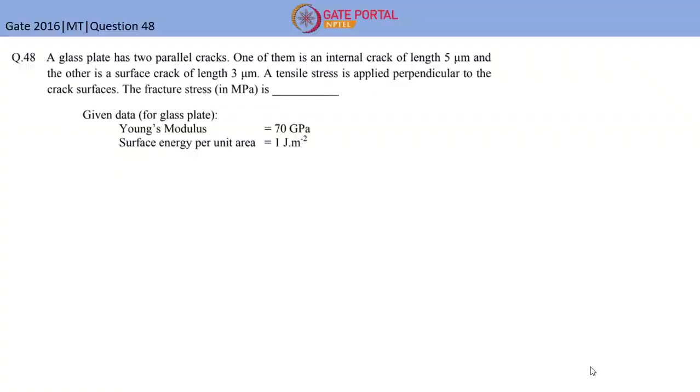So similar questions will be there in GATE also. These questions most of the times repeat by changing the values. So if you know how you can calculate that, you can get the answer very easily in less than 1 minute or so. So don't spend more time in this question. This is a fundamental question, only one formula you have to just add.

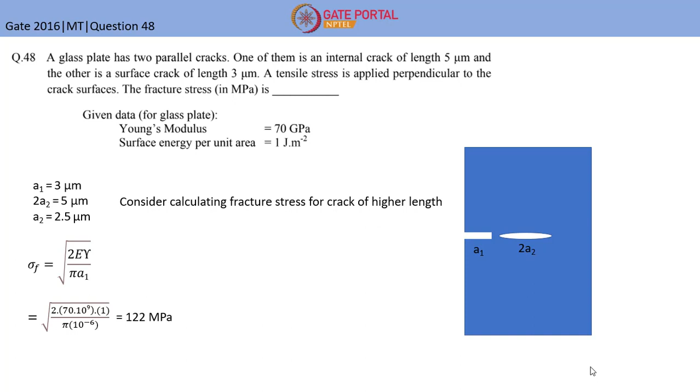But make sure that you use the GATE calculator, like you have hands-on practice on that GATE calculator, which is the online calculator. Sometimes the units may mismatch and you may get some different value. So this is another question. So I will give you 3 minutes to solve this.

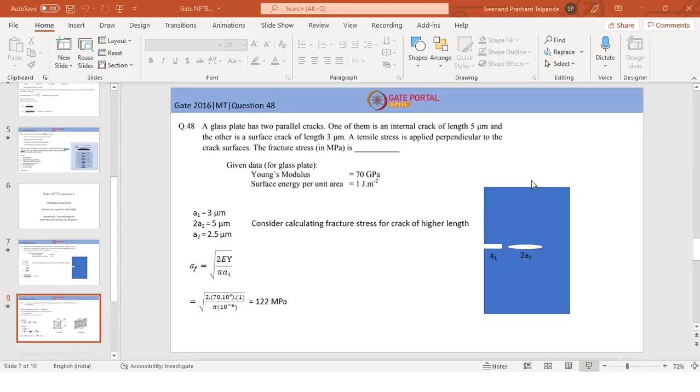Anyone got the answer? Root 3. Okay. 1.41. Okay. Anybody else? I will give you one more minute. We have to just find the surface energy of 100 plane and 110 plane in a BCC crystal, and we have to take the ratio of that.

This question comes repeatedly in GATE. You may know FCC crystal, BCC crystal, different planes. You need to focus on three main planes: 100, 110, and 111. You need to know how these planes are arranged in a BCC as well as FCC, which is the close packed plane and which is the open plane. That thing you need to know.

And what is the basic funda of surface energy, like why the surface has some extra energy than the bulk, that you need to know. In this, three concepts are there basically. So I will go through each of the concepts. I guess enough time is given, so I will proceed. Okay, so here we go.

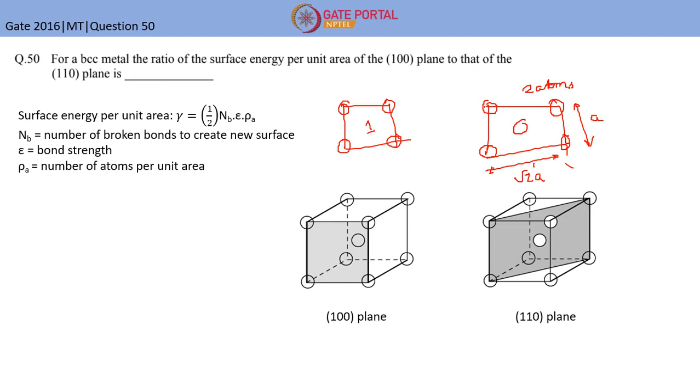So this is one atom, and this is another one atom consisting of four 1/4 atoms. So here 1, and this 1/4 of 4 atoms, which makes 2 atoms. And here also similarly you can see this projection will be a square consisting of 4 atoms. This, this, this. Now you have to see how much comes into this square. So this is 1/4th, 1/4th, 1/4th, 1/4th. So it accounts for 1 atom in this plane, and this accounts for 2 atoms. I hope I cleared your doubt. So you have to take a 2D projection.

Chintu, did I clear your doubt? Okay. So let's proceed to another question. Again, this is a numerical. I will give you 3 minutes to solve this. Okay. Solve this question. This is related to casting.

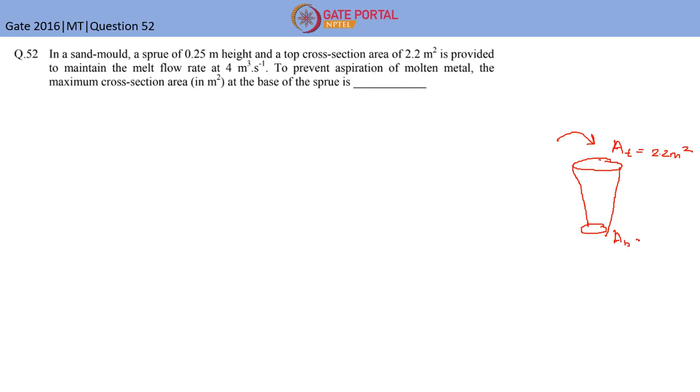So as you may know, sprue is like a chamber. I will just draw it here. So sprue consists of this and this. So it will be connected like this, and from here we pour the molten metal. So they have given us the top surface area AT, which is 2.2 meter square. Now we have to calculate AB.

So firstly we should know what is aspiration of molten metal. The pressure in the liquid metal stream moving through the sprue should not fall below the atmospheric pressure. So here P1 and here P2. P1 and P2 should be same. If these are not same, then atmospheric gases can be absorbed in the molten metal in low pressure areas, and this phenomena is known as basically the aspiration effect.

So if this phenomena occurs in casting, then our casting will be porous. Most of the regions will have some porosity because of these gases. Hence we want to avoid this. So we have to design a sprue in such a manner that no aspiration takes place. Given is that the flow rate is 4 meter cube per second and height of the sprue is 0.25 meter. Because of continuity equation, the flow should be equal from top and bottom, so that no gas can enter.

So A1 V1 equal to A2 V2, and V2 is given by root of 2gh, and this is derived from Bernoulli's principle. You can refer to Bernoulli's principle. It is a small concept where you can find out that V2 becomes root of 2gh. Hence Q is 4, equal to the final area into root of 2gh. g is 9.81 and height h is 0.25, and we have to find out the area. So area comes out to be 1.806 meter square.

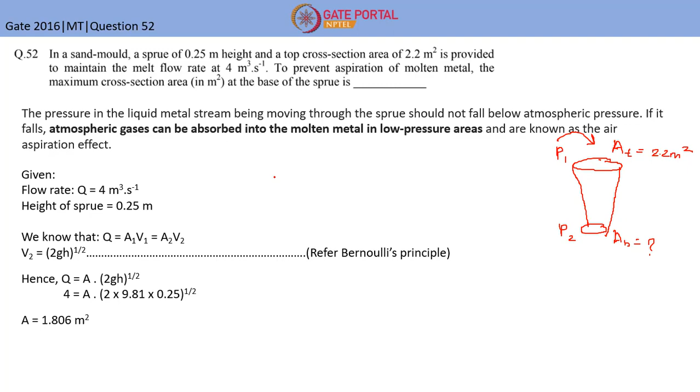Yeah, so air aspiration means, let's say you have a molten metal as well as air surrounding that molten metal. If pressure drops, what do you mean by pressure drops? If the continuity of molten metal is not achieved in a sprue, and the pressure is low at certain regions where the molten metal is present, this gas will try to get absorbed in the molten metal, and when it solidifies later, the solidified workpiece will contain porosities because of these absorbed gases.

So in order to have a casting with no porosity, we need to have continuity, and we need to design a sprue in such a manner that no aspiration takes place. I hope this answered your query, Prasanna. If you go to Bernoulli's principle, then you will be able to more appreciate this thing, how it will be.

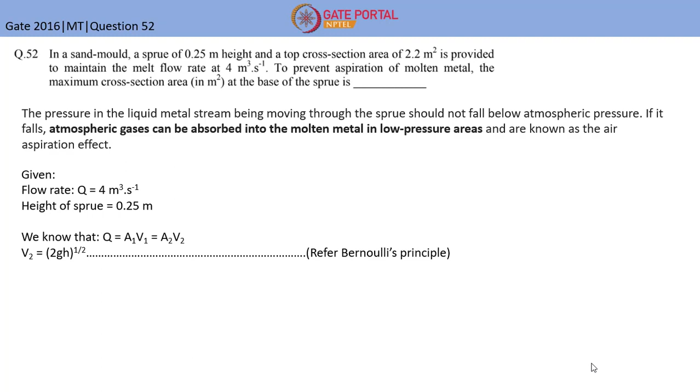So now we will go to the last question for today's lecture, and this is the match the following question, which I guess most of you can solve. This is from manufacturing processes, different manufacturing processes. This is also a 2 mark question. So if you have knowledge of all these processes, you can easily solve this. So I will give you hardly 2 minutes to solve this. Just text which one of the options A, B, C, D is correct in the chat box.

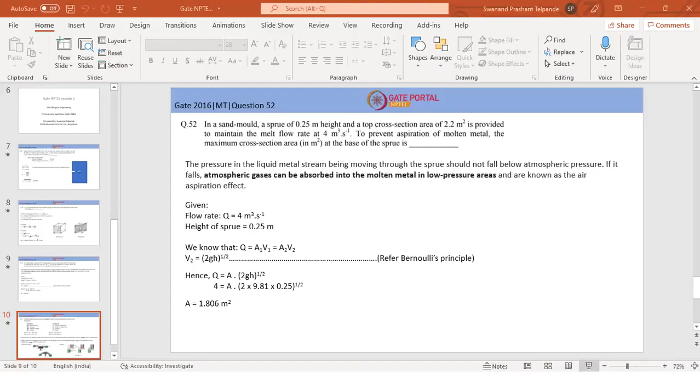ACCC. Okay. Other guys also try to solve. It's an easy question if you have studied any of these manufacturing processes. Otherwise, I will just discuss what these processes are. Most of you are good. Okay, so most of you have guessed it. Let's start with this question.

So this is GATE 2016 Metallurgical Engineering question number 55. Match the deformation processes in column 1 with the corresponding stress states listed in column 2. Column 1 is wire drawing, forging, stretch forming and cutting. And column 2 is direct compression, indirect compression, tension and shear. So before proceeding to answer this question, we should know all these four processes.

First is wire drawing. In wire drawing we apply an external tensile stress which induces two mutually perpendicular compressive stresses. So if we try to pull something out of a narrow hole, because of that narrow hole, two mutually perpendicular compressive stresses act, which gives thinning of that wire, and we are able to draw wire of lesser cross section than the earlier one. So that is wire drawing. Here we are applying a tensile force, but it is giving compressive stress near the hole, which is indirect compression. So P corresponds to 2.

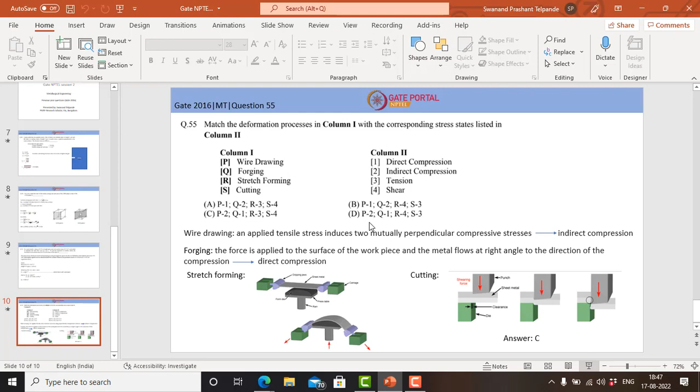I hope this is clear to most of you. If you have any doubt, you can ask regarding all the four questions. We have finished all the four questions. Now you can ask me any general doubt, or what we can have in the next session, so that you will understand a few things better which you couldn't understand today.

What topic? I mostly cover crystallography, solidification, mechanical metallurgy, and a few physical metallurgy questions. So more or less I cover most of the things. It's not a dedicated session to any particular topic. So you will be able to get the crux of everything.

Which book shall we read for mechanical metallurgy? So for mechanical metallurgy, one good book is Thomas H. Courtney, and another one is Dieter, which people usually follow in BTech. So these two are pretty good books you can refer to.